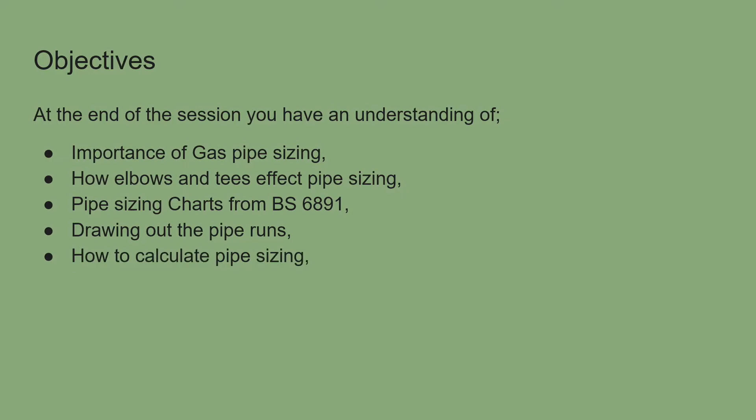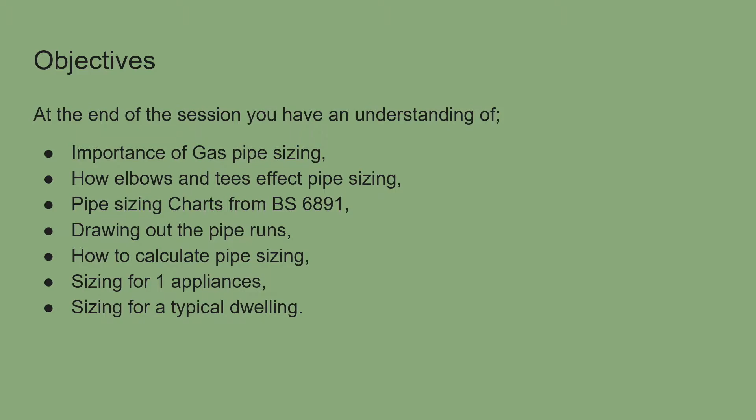You'll be able to draw out the pipe run and understand what you are looking for when doing this, how to calculate pipe sizing, and then at the end of the session you should be able to size for one appliance, and then we'll look at sizing for a typical standard dwelling, which will only have so many different types of appliances on it.

Importance of gas pipe sizing: it is important to get the correct gas pipe sizing in place when designing for a property, for several reasons, but I'll focus on the main ones now.

It's to supply the correct pressure to the appliance, so it will work at its maximum efficiency, and also it protects you and the appliance and hopefully maintains the manufacturer's warranty.

Boilers are very, very fickle. If they, or any gas appliance, do not get the correct amount of gas going to them, they do not work properly and you will never get the maximum out of them, which could also lead to poor performance and cost you more money as a customer. So it's very important to get this correct.

The appliance must not starve another gas appliance. So if you're in a house with more than one gas appliance and you size it incorrectly, say you've got a boiler and a gas cooker - you've got the cooker on, you light the boiler up, the boiler will then pinch the gas from the cooker, and it could cause your cooker to go out and have gas leaks, which could be very dangerous.

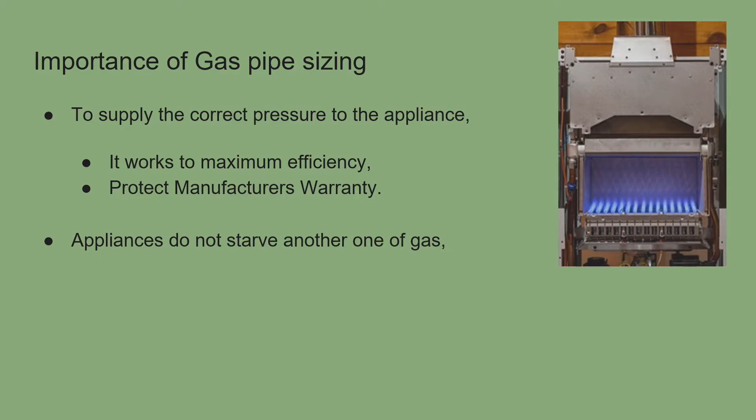So you've got to make sure you do this correctly. If you don't, you could have explosive ignition - once the boiler stops working, the cooker could relight and cause it to explode, which is not good.

Next, you would have poor performance of the appliance. For those with a combination boiler at home, if sized correctly, you will get good heat from your water. But if sized incorrectly, your water will never reach the desired temperature.

Over the entire run, or carcass as we call pipe work in the gas industry, you must not lose more than 1 millibar of pressure over the entire run, from the gas meter to the appliance.

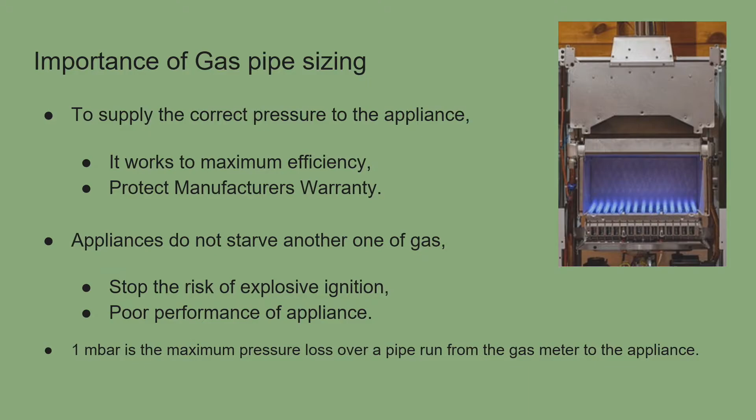Right, this is the important part of sizing gas for an appliance - how do elbows affect your pipe sizing?

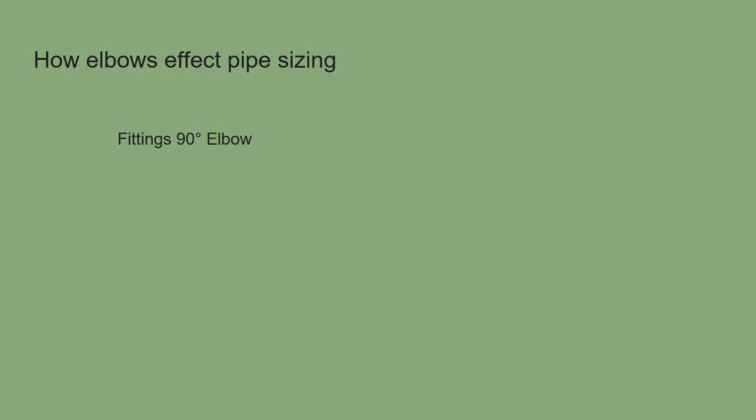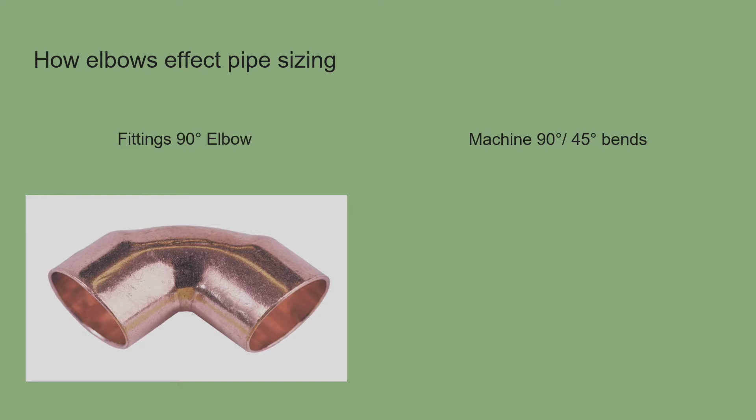First things first, we're going to look at the fittings. A 90-degree elbow is a normal copper pipe fitting that we use, and it is a very tight bend. The other types of bends we can have are machine bends or mechanical bends, where we bend them with a pipe bender - this could be a 90-degree or a 45-degree bend, using a manual pipe bender.

As you can see, a nice natural mechanical bend with a long radius causes less restriction because we're guiding the gas round. But with a 90-degree elbow, the gas has to hit the bottom of the elbow and then turn round and change direction, so it's not good. As the pipe size increases, the resistance does increase a little bit.

These tables come in later on when we are looking at sizing for the pipework.

Right, how do tees affect it? A T is a three-way pipe where gas can come in one way and go out the other and out the top, or it can come in the top and go in different directions. Either way, it is not good, so we need to think about which way the gas is going in.

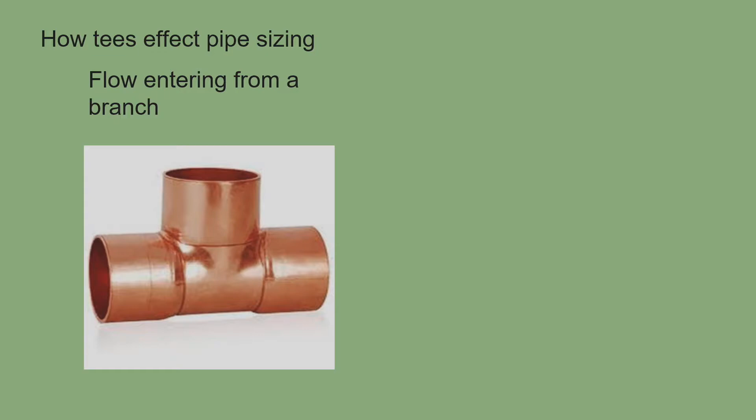Flow entering from a branch means the gas is coming down into the T and splitting in two directions. This can cause more problems.

The next one is the flow exiting into the branch. This one's nice and straightforward - the gas comes in, and when it goes straight ahead, it doesn't affect it at all, there's no resistance, it's like going through a pipe. But as soon as it has to change direction, we now have another problem.

When it comes to sizing, one key thing to remember is we always take the largest opening on these T's for working out how much resistance there is. So it doesn't matter whether you're going from, say, 28 to 22 and then up the top as a 22, we always use the 28, the largest size.

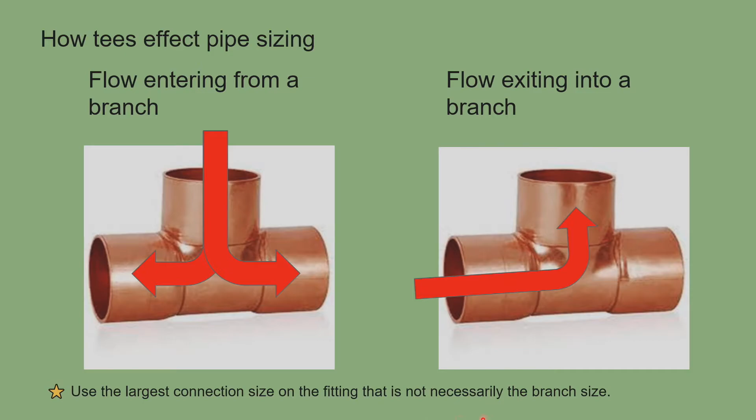So if we have a look here, flow entering the T, when the gas comes through the top and goes through to the sides, we have quite good resistance. If we go to 35mm pipe, it's the equivalent of 2 meters of pipework. We've got to bear this in mind when we're sizing.

But if we're coming in and then going across, flowing exiting the T, it's 3 meters - a lot more resistance because the gas has to change direction. It's got nothing to hit, nothing to help guide it, it's got to change direction. So this can cause quite a big resistance, and it's very important we remember this when sizing.

Now, when it comes to the sizing of gas pipework, there are quite a few bits and pieces we've got to bear in mind. We've got a few more sums to do - working out the size of pipe we're using, how many elbows, everything else. We also have to work out how much gas an appliance needs.

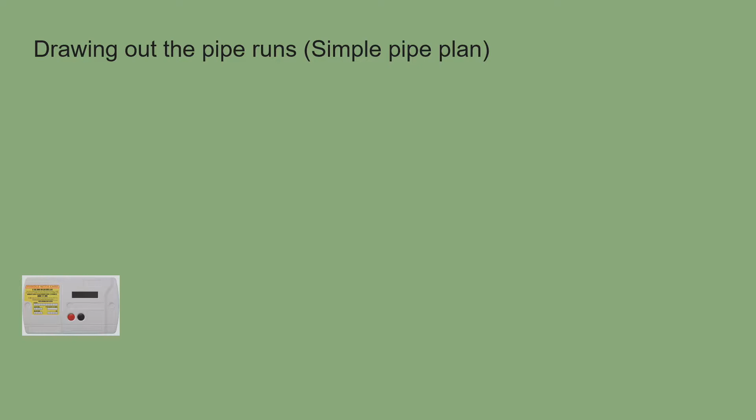Let's find the right one. When it comes to drawing out your system, you've got to first start off with your gas meter - where is your gas meter? Then you've got to decide what we're going to size. In this case, I'm going to have a gas fire, so we've got a nice simple gas fire connected to the meter.

Then we've got to trace the pipework. So the pipework comes out from the meter, with an elbow on the top, an elbow going down, and an elbow coming across into the property.

Okay, that's one. So we've followed these elbows and worked it all out. Then it comes across underneath the floor and then comes up into the gas fire. Now, a lot of the time, I know some houses the pipework is hidden, so you've got to try and work out where this pipework is. If you are a plumber or a gas engineer, it gets quite easier over time.

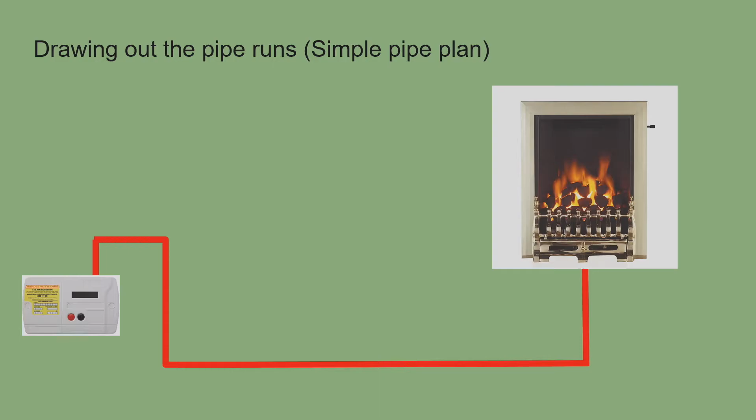To start with, you just roughly work out where it is. Then we've got to pick out a point, so later on when we've got more than one appliance, we've got a starting point and an end point. So we label them all up. For this one, the gas meter is going to be A and my fire is going to be B, because we need this for the tables. Then we measure all the pipework and work out what the lengths are. Very simple, very quick and easy to do. Again, you can guesstimate it if you can't find the pipework, roughly working out where someone has run the pipes.

Then we need to know the kilowattage of the boiler, or in this case, the fire. For this case, the fire is going to be 7 kilowatts net. Very important, remember all the grosses and nets. Make sure that you follow the right one.

Right, now that was a simple one pipe system. Now we're going to go for a typical system, a standard system. So on this one, we've got another gas meter, a gas fire, a boiler, and then we've got a gas range cooker. So we've got to work out the pipe sizing for this installation.

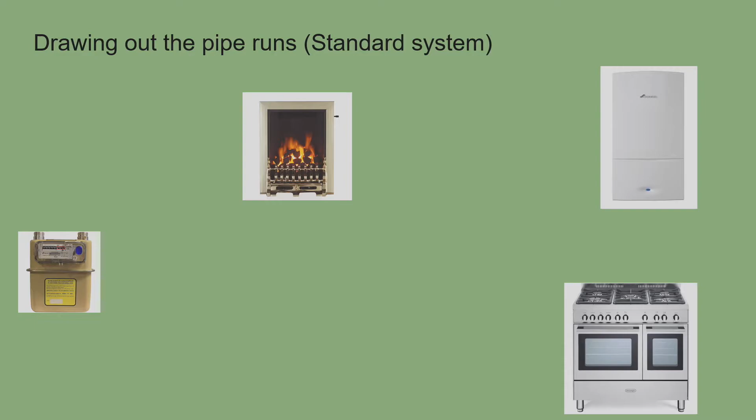First things first, trace the pipework. Work out where all that pipework goes. I do apologise, I know I'm not the best when it comes to drawing this. I had a little bit of a shaky hand, so they are connected, please bear with me.

Alright, so again, now we letter it up, so the meter would be A, but this time we're going to go to the first changing of direction. So the first T is B. As you can see here, this is the first T, and then we're going to go from B up to the gas fire, so we're going to make the gas fire C. Then we've got to go from B down this end to this T here, so that one is going to be D. Then we're going to go to the cooker, the cooker will be E. And then the boiler, which will be F.

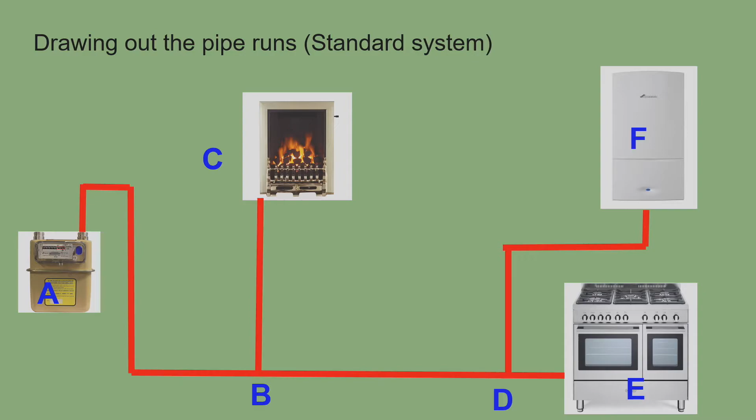Nice, simple, straightforward. So once we've got it again, all lettered it up, we've got to go around and measure all the pipework. We get it all measured. We are laughing, we're on our way to working out the correct gas pipe sizing for this installation, but we're still missing the kilowattage.

So I want to whack that in. We've got the fire, which is 6.5 kilowatts, this is just an example, not all fires are this, they can change. Then we've got the boiler, which is 32 kilowatts. Again, depending on the size of the property depends on the size of the kilowatts of the boiler. And the cooker, I put down here as 18 kilowatts. Cookers again can be any size of kilowatts. You've just got to check the back where the data badge is and it'll tell you what the kilowattage is.

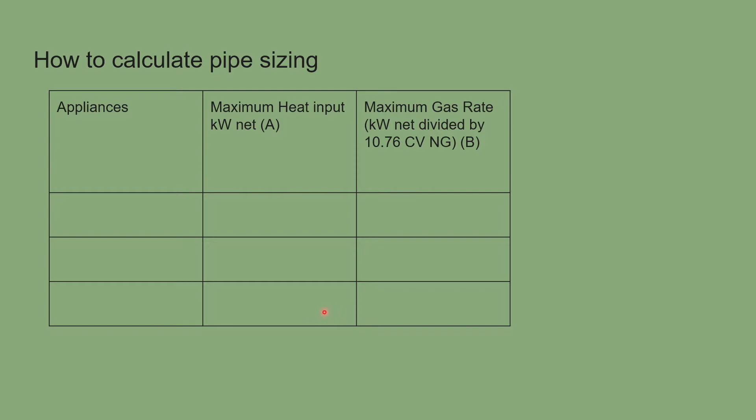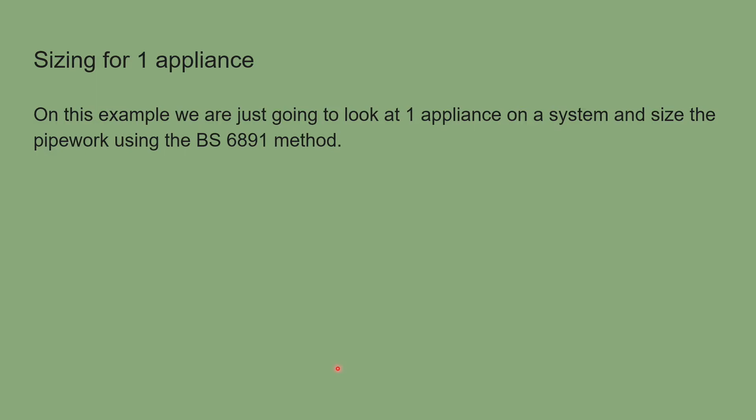So let's have a look. On this example, I have only got one appliance on the system, and we're going to size it to BS 6891. Remember the first one we drew, where we have a gas meter labelled A, and our pipe run going along to our gas fire labelled B, which is a 7 kilowatt net appliance.

So first things first, here is that bit that I always like to do. We put the appliance in here, then we put the 7 kilowatts net in that box there, and I divide that by 10.76, which gives me a gas rating of 0.65 meters cubed an hour. I like to follow this one on that one. So remember that detail, 0.65.

First things first, we're going to look at this little table here. As you can see, I've adjusted it. We only need the one line for this because we've only got one section to worry about. So let's have a look-see here. We've got A to B, nice and straightforward, and we've got 1, 2, 3, 4 elbows. We've worked out the total length of the pipe, so we've added all this together, it's 3.2 meters.

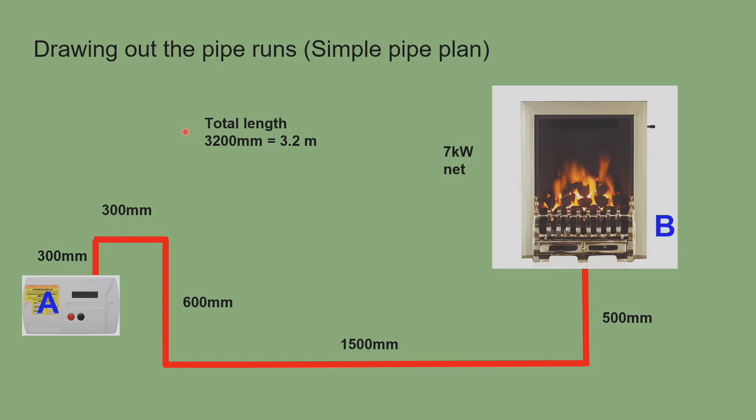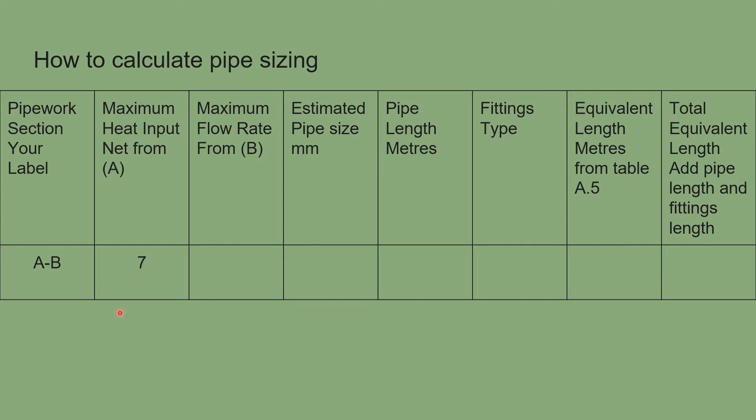So we take the information, we put in section of pipe, so it's A to B from the meter to the fire. We put in 7 kilowatts for our maximum heat input, divide that by 10.76, which gives me 0.65. Our estimated pipe size, which I've said already, is going to be 15, so I'm going to guess it's 15.

If you're doing this in real life, at this point here, we go from pen to pencil. This is another reason why I like doing it on the computer, as you can quickly change it. If you do it in pen, you've got to scribble it out and change the sizes. So from then onwards, I usually use a pencil.

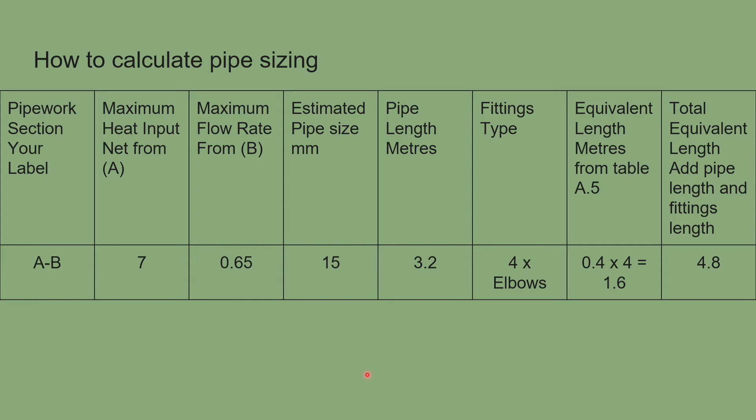My pipe length, we've already said, was 3.2 meters, and I've already said that we have 4 elbows. Each elbow is the equivalent of 0.4 meters, so 0.4 times 4 equals 1.6. So we add the 1.6 to the 3.2, and that gives me 4.8 meters. That's the equivalent length of that bit of pipework if we straightened it out with the elbows in. So we take that information, we put it in this box here.

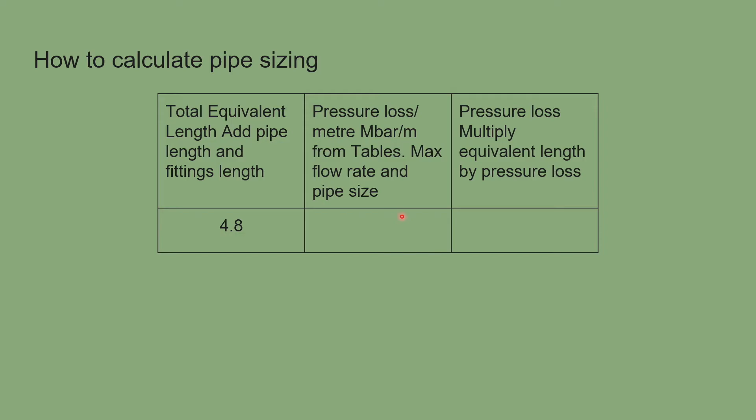0.0447, that is the answer we need. So what they're saying is for a metre of 15mm pipework, you will lose 0.0447 millibars of pressure if you were trying to push 0.75 meters cubed an hour of gas through it.

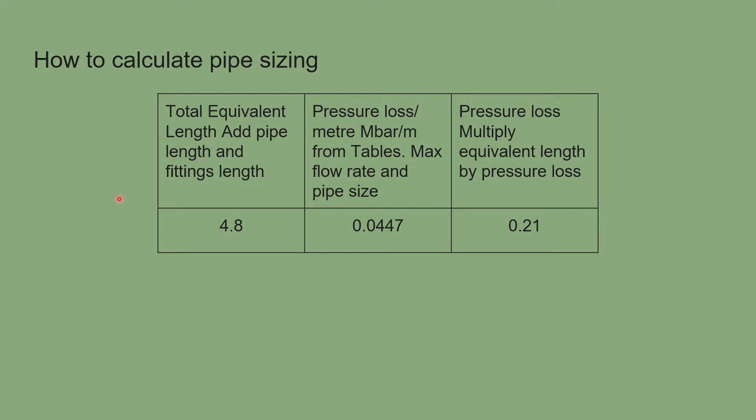So we put that reading in there, nice and straightforward. That times by 4.8 gives me a loss of 0.21 millibars over that entire run in 15mm pipe. So it's good, I like this one.

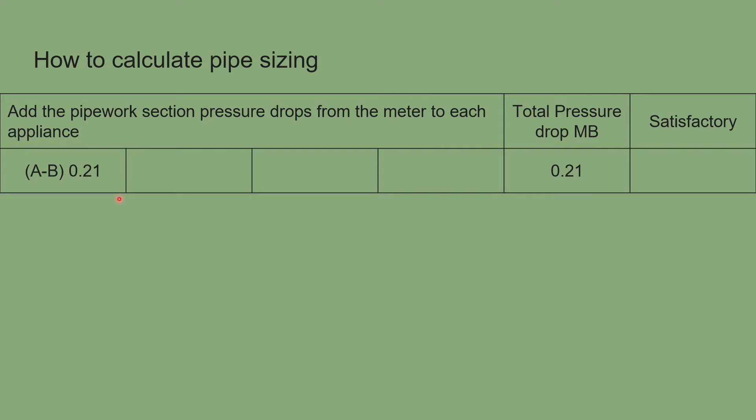So we take that information, we go A to B, 0.21. Our total loss in the end is 0.21. So is that satisfactory? Is that more or less than 1 millibar? It is less than 1 millibar, so yes, the installation has been designed correctly.

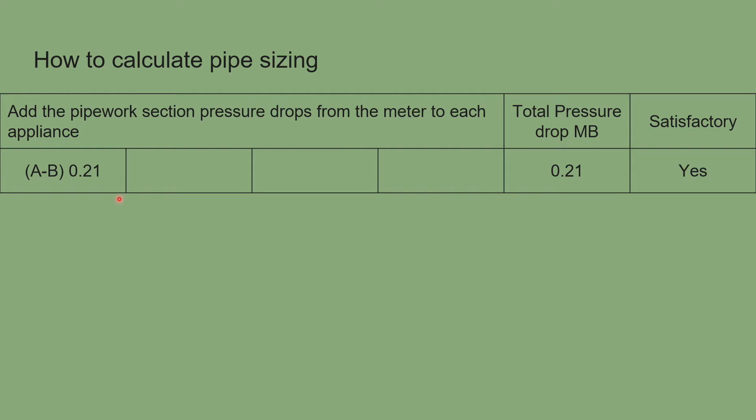Nice, easy, only one appliance. I love one appliance installations where I don't have to do that much thinking about it. I can just go in, work out the pipe lengths, and I know what sizes I'm going to use. But the problem happens when we start putting in more than one appliance.

Sorry, having a drink.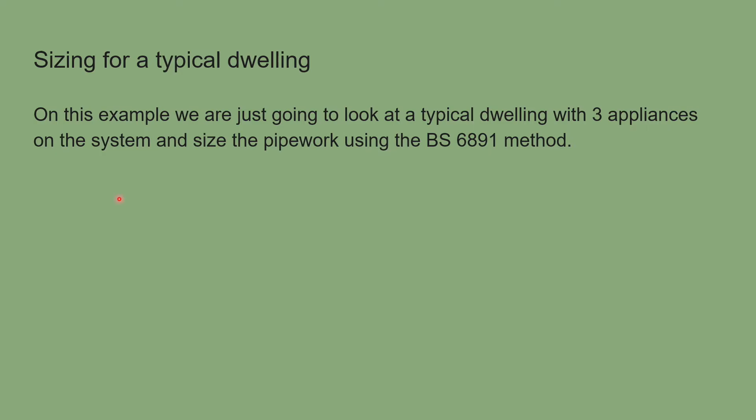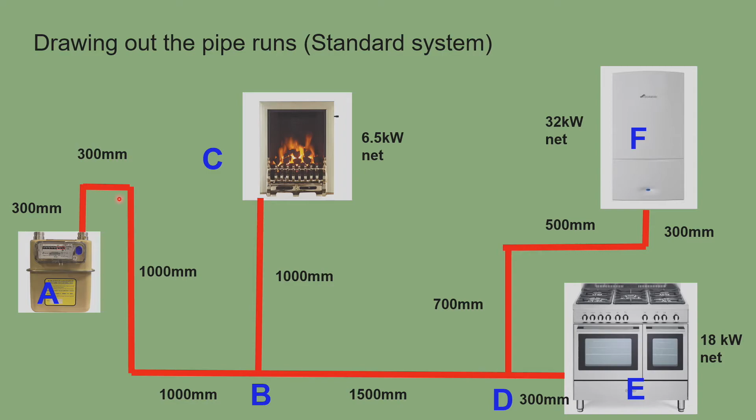Now remember the standard system where we have a gas fire, a boiler, a cooker. We've now got to work this out. We've split it all up into its various categories, so we know where everything is. I've now split my appliances, and I've got 3 lines, so we can put them in.

So my gas fire was 6.5 kilowatts net. All I've got to do now is convert it into meters cubed, so that is 0.6. Then we got the cooker, that was 18 kilowatts net, we changed that into meters cubed an hour, which is 1.67. Then we got the boiler, 32 kilowatts, works out at 2.97 meters cubed an hour.

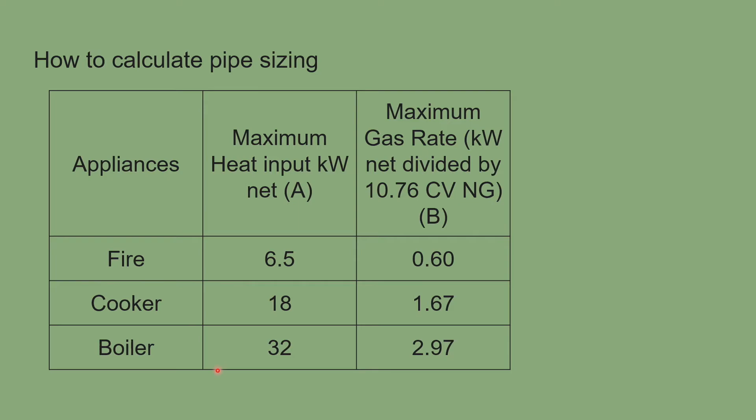Now we can go to our next table. We're now going to look at the various sections. So the first section we're going to look at is A to B. Let's have a look at the typical system. So here is A, there is B.

So from A to B, we've got 1, 2, 3 elbows. We don't include this T because we stop at that T, that is where we're going to. Then we also need to know how many appliances are on this length of gas pipe, in order to supply enough gas to the appliances connected. So at this moment in time, all 3 appliances are connected to A to B. We're going to have to remember the 6.5, the 32 and the 18 kilowatts net.

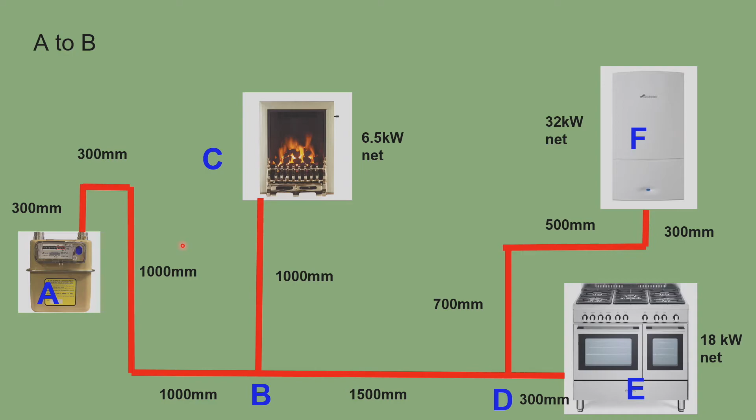Our lengths, so we got 2.6 meters of pipework, 3 elbows and our appliances. So let's start putting the information in, A to B, in.

As I say, all 3 appliances are connected, so we add them all up. That gives me 56.5 kilowatts total requirement on that one length of pipe. We've got to supply enough gas for all 3 appliances on that section of pipe. We change that to meters cubed an hour, so 5.25, brilliant, we're happy with that.

Then we're going to estimate our pipe size. Because it's such a large quantity of gas we're having to pass through, I'm going to say 28 mil. We've worked out that the gas pipe length was 2.6 meters, so I want to put that in there. Just checking the elbows, 1, 2, 3, 3 elbows, no T's, no nothing else on there, so we can put 3 elbows. Now we've got to go back to this table here.

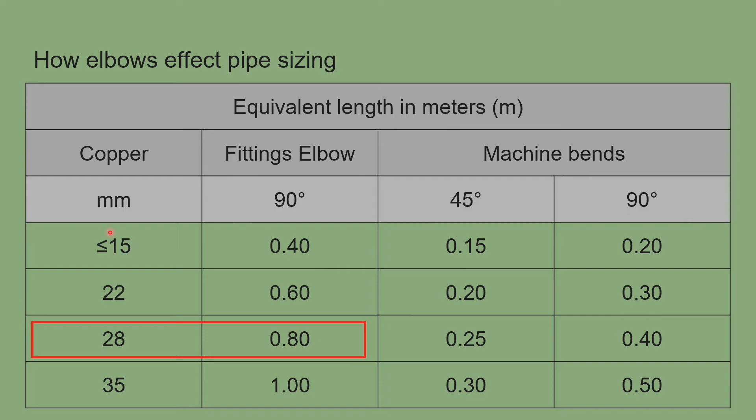We're going to use 28mm pipe, so we use 0.8 as our equivalent length for each elbow. So 3 elbows times by 0.8 equals 2.4 meters. We add the 2.6 and the 2.4 together and we come out with 5 meters. That's the first bit done. Now let's look at B to C.

So B to C is here. B to C, so we've got 1 T. But we need to remember, is it an exiting or an entering T? This one is an exiting T, because it's got to go along and then up. And we're going to C, so there's only the one appliance, there's no other T's or anything like that.

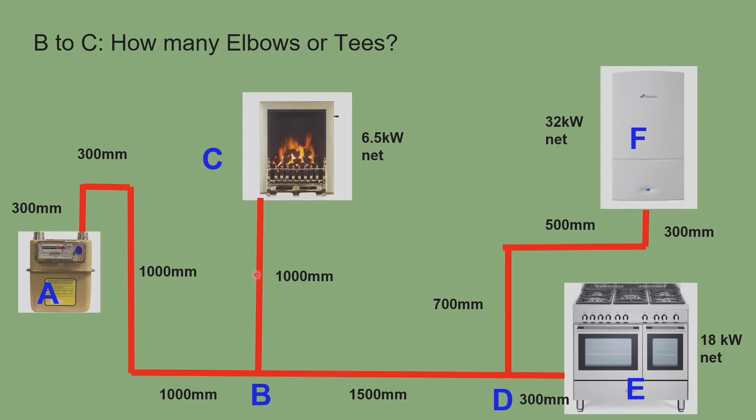So we'll start putting the info in, B to C. As I say, we've got one appliance on there, so 6.5 kilowatts, change that into meters cubed an hour, 0.6. On this one, we're going to stick with a straightforward 15mm pipe. We'll put in the length, which was 1 meter. As I say, we've got to remember the T, is it an entering or an exiting T.

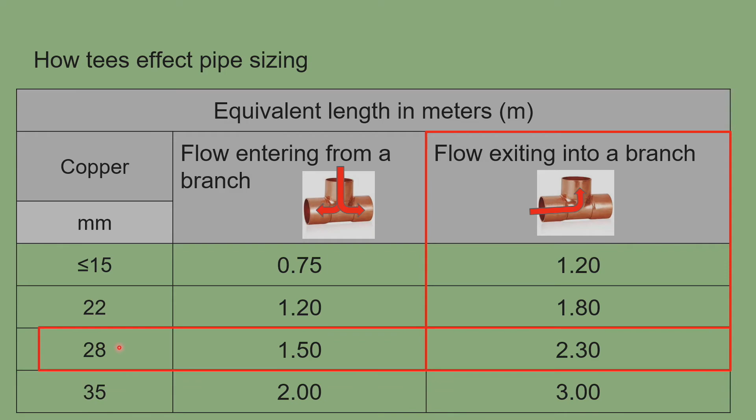It's an exiting T, so then we go to our little table here. We're going to be using the largest diameter pipe. I know we're going to 15, but it's connected to 28mm pipe, so we're going to use that length there. Then we're going to be using exiting because it's going to come across and then up. So we've got to add 2.3 meters to that pipework. So 1 plus 2.3, 3.3.

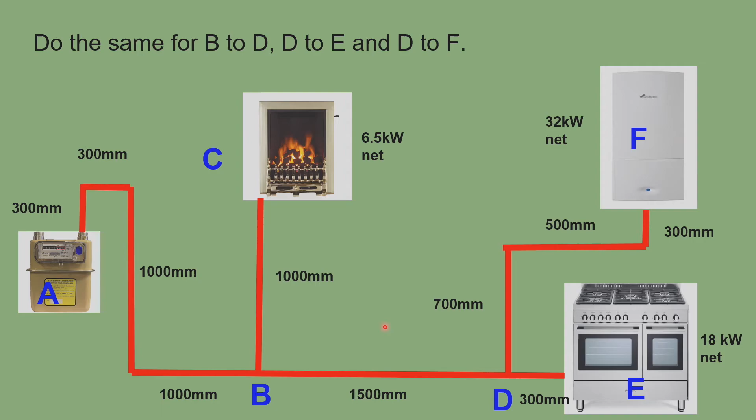Now we go B to C. In fact, we'll cover them all - we'll do all the rest in one go. So we're going to go B to D, D to E, and D to F. I'm not going to go through backwards and forwards through the picture. We'll just remember all this information and start putting it in.

So, B to D, we have only 2 appliances left. We've already covered the gas fire, so we can take that straight off. So it's only going to be 50 kilowatts. We change the 50 kilowatts into meters cubed an hour. This time, because we've taken the gas fire off, I'm going to drop the pipe sizing down to 22mm.

So B to D will be 22mm. It is 1.5 meters in length, and there were no T's, no elbows affecting it in any way, because it was just a nice straightforward length. So that's going to be 0 all the way along, and the end point is going to be 1.5 meters.

D to E, we've got the cooker. And the cooker, again, is a nice straightforward connection - it's only the one appliance. I'm going to change that 18 to meters cubed an hour, so that's 1.6. I'm going to use 15mm pipe because it's only the one appliance and it's fairly low kilowattage. 18 is quite high, but it's a fairly low kilowattage, it will be fine.

We've got 0.3 meters of pipe work. As I've said, there are no elbows, no T's that will affect it, so it's nice and straightforward, 0.3.

Now, D to F is going to the boiler, so there's 32 kilowatts there. We change that into meters cubed an hour. And I'm going to guesstimate my pipe work because it's a larger appliance - I'm going to give it 22mm pipe work. It is 1.5 meters in length.

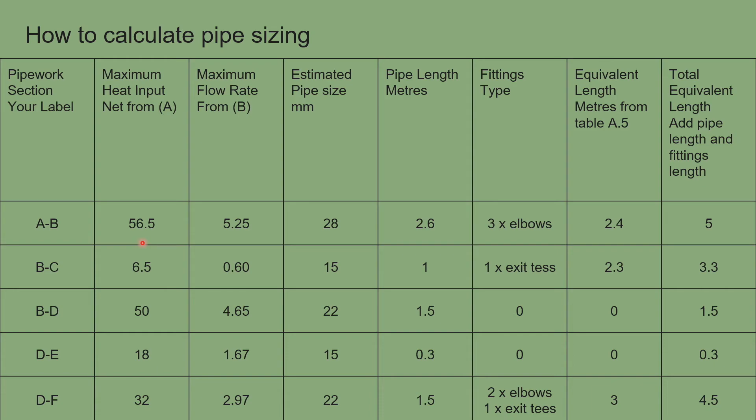Right, so now we can take this information and put it into a table. I have added these 2 extra columns here just to refresh the minds so you know where I'm coming from when I go through this one. So the first section, A to B, I said was 28mm pipe. We've got to get 5.25 meters cubed of gas going through it.

The second section was B to C. That was 15mm pipe, and it only had 0.6 meters cubed of gas to get through it. Then it was B to D, 22mm pipe, 4.65 meters cubed an hour. Then it was D to E, which was just the cooker, so that was 1.6, and then D to F, which was the boiler, 22mm, with the 2.97.

So we then go back to our little table here. So we'll go, all appliances are on first section, A to B. So we've got to change that into that, so we can whack that down there. As you can see, it's dropped right the way down to the bottom.

These little lines here mean that you cannot use this pipework to pass this much gas through. So we cannot use 15, 12, 10 or 8 - it's just not allowed, it never will work. 22 can, as long as it's not too long. 28 and 35, very easy. But our pipework is 28, so we'll whack that little line in there. So we've got to remember...

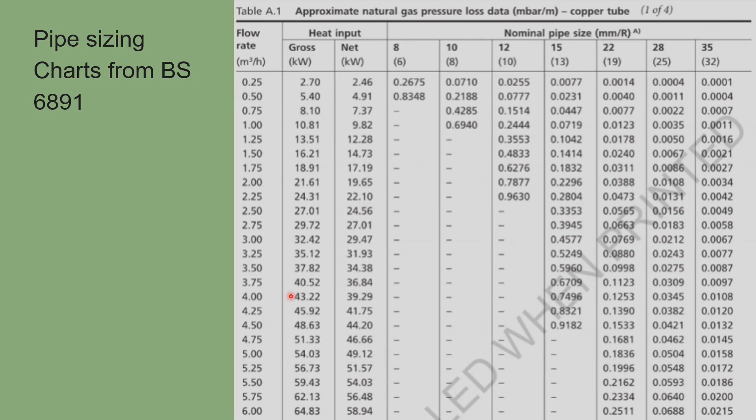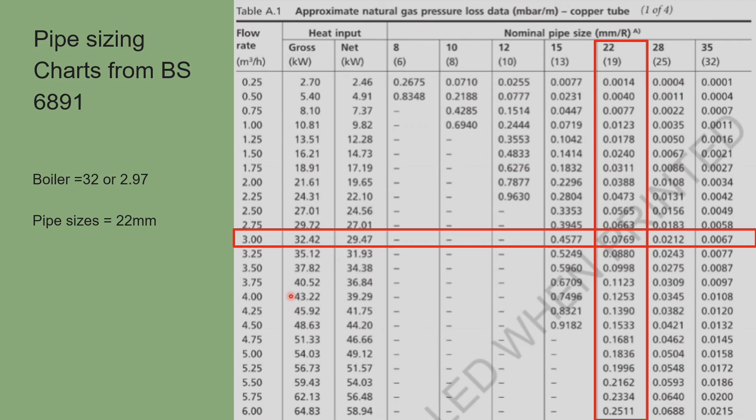So the last one on here is the boiler, quite the biggest appliance out of all 3. So we find that one there. There's the closest we got, which was 3 meters cubed an hour. We're going to use 22mm pipe, so we go along there, and that leaves us with 0.0769, so we put that in that box there. We times the 4.5 and that together, and it gives me 0.35. So we just put the foundations of it all in place.

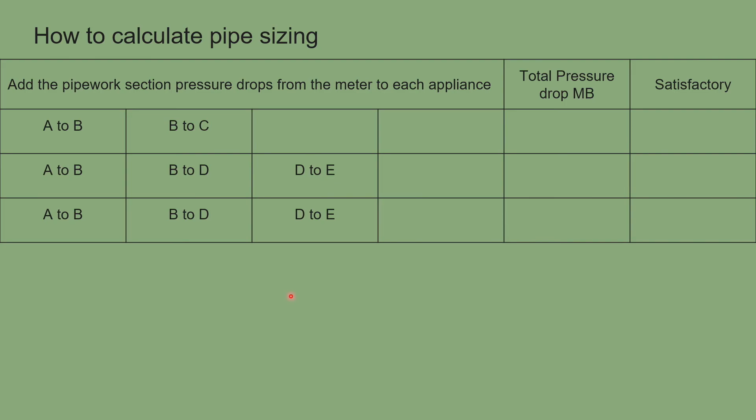So now we go to the last part, the important part. This is where we find out if the appliances are going to work. So we go to our little table here. To get to the cooker, to get to the fire, we've got to go A to B and then B to C. So we're going to come from the meter to the first T, then we're going to go from the T to the gas appliance. So let's have a look on here. So this is A to B and this is B to C.

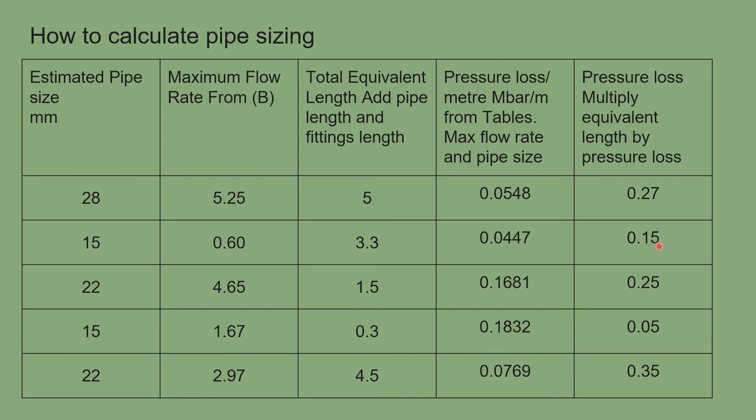So we've got 0.27 and 0.15. So this is the section we need, so we're going to put these in this little table here. We put 0.27 there and 0.15 there. That's the fire done, because that's all we need to do to get to the fire. So we added them all together and it works out at 0.42 millibars loss. We put that in that box there. Is that less than 1? Yes, it is. So it's going to be good.

So we then go A to B on here again. This is going from the meter to the cooker now. So we've got to go A to B, B to D, and then D to E. So we go and get all the information from all 3 of them, and we put them in the box. So 0.27, 0.25, 0.05. We add them together, and that gives me a grand total of 0.58. Again, we look at it. Is it okay? In my brain, yes, I'm saying yes.

Then we go to the boiler. Well, it's got to go A to B, B to D. So we already know the readings on there. Now we've got to go - that should say D to F on there, so I do apologise. The joys, we do make mistakes occasionally. I will fix that one later. So D to E, F. We add them together, 0.87. A little bit close, but technically speaking, it is less than 1.

So we already know that one is correct, we already know that one is correct, and as that one is less than 1, that is okay too. It will work, so it is all less than 1 millibar drop. If, however, you are thinking later on you might add another gas appliance to the property, that one there to the boiler would be something I would be worried about, so I might rejig that around. But as a gas engineer installing the job, if no one told me there was going to be nothing else put in, I'd be more than happy with that, and it would work perfectly fine.

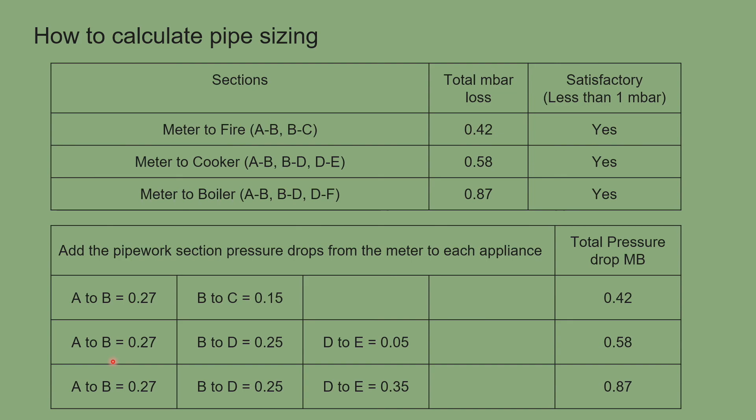But all three appliances would never starve each other, they would work to their peak efficiency, and if you did happen to have the gas fire, the cooker, and the boiler on, which most people have at one time of the year, it will not affect any of them. They will work perfectly.

So in summary, you should hopefully now have an understanding of the following areas: the importance of gas pipe sizing, how elbows and T's affect the pipe sizing itself, where we add more meterage, the equivalent length of a meter, the pipe sizing chart found in BS 6891, how to draw them, how to calculate, and you should be all right now to have a go at maybe at your own property.

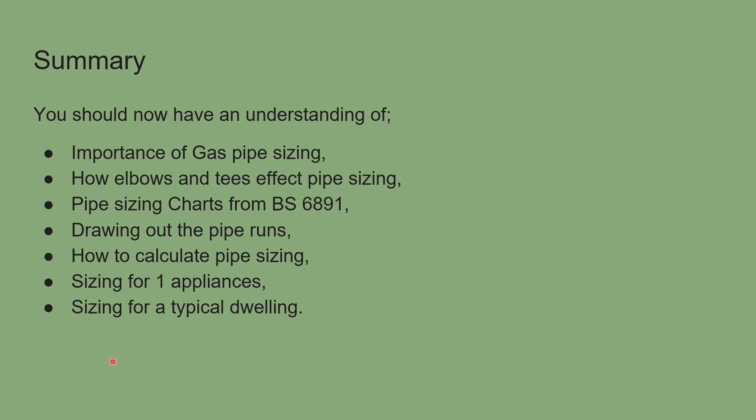Why not have a go? See if you can work it out. Go through this PowerPoint again. If you are using natural gas, it will work properly. Pause the video on the chart so you can quickly work it all out and see if your gas pipe work at home has been sized correctly by the engineer who installed it.